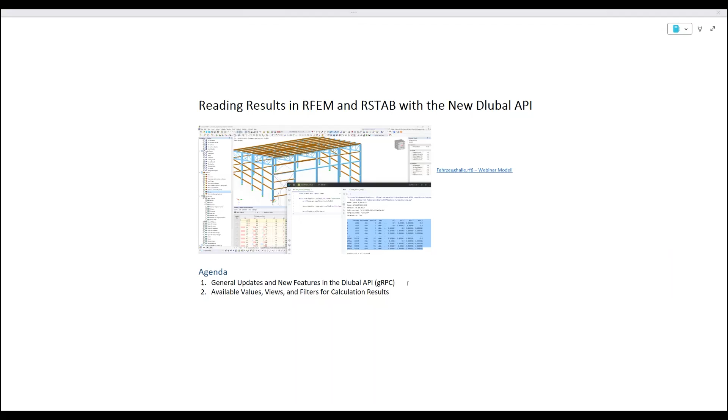The second part is our main topic, working with results. I'll show you some code, we'll go through the application together, look a bit into debug mode, and see how this is structured in the background and how you can work with it, plus some best practice tips on working with metric and imperial units with our results. So stay tuned, and I hope you enjoy today's webinar.

So just try it out, go into the basic settings of your program. I'll take a quick look afterward at how to get access via the API, but there's also a first webinar in this series with more focus on the basic settings. So here today, I assume you already know how to set it up, how to do your authentication, and how to get an API key.

All this is still valid, but we changed the subscriptions and agreements. So you just need to make sure you have an API key in your extranet account — check the previous webinar for that, please. With the change, we now have a pricing model where you can use 1,000 API requests per month for free, with full access to features regarding input data and results, which we are demonstrating today. What's important to mention is that we changed the way requests are counted.

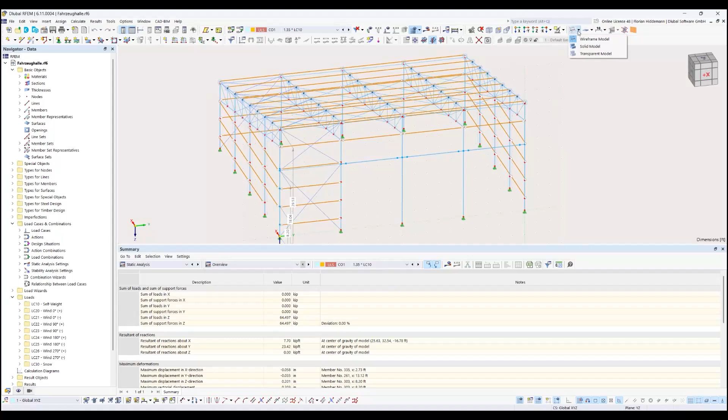I have an example model here. This is just a small construction with steel cross-section profiles and timber together, so I can demonstrate with you some results from the add-ons as well. This model will provide some results which we analyze and get via the API.

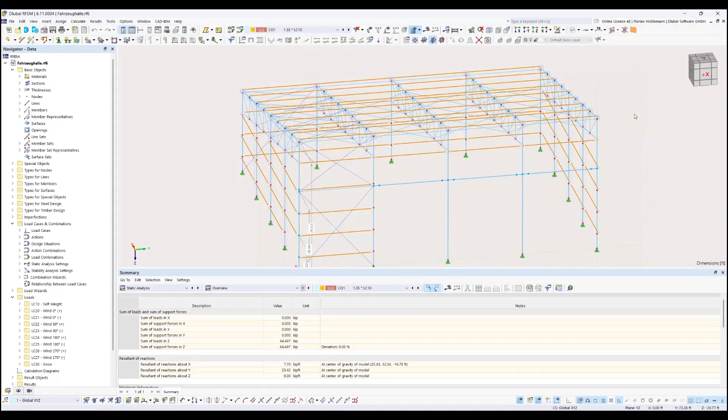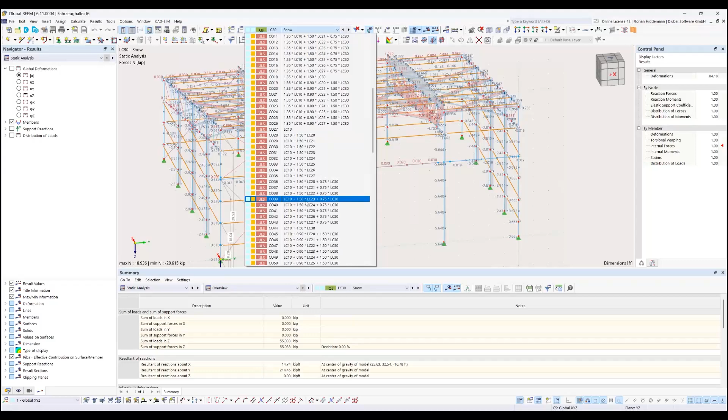So it is already calculated. We have some results here in the graphical user interface. You can see there are some imperfections defined in a few directions. We have the wind load assistant here, the snow load is applied, and it produces a lot of different combinations now. We will focus on getting some results and working with them via the API now.

So I'm using an IDE here, PyCharm. It's available for free. You can, of course, use whatever you want. But here I will go through these chapters together with you to demonstrate how it's working.

First of all, before we get into the results themselves, I'd like to highlight the differences you need to address for RFEM and RSTAB, because we are quite proud that this is available via one package. As you might be used to, you know already from Dlubal API, you import RFEM to work with the application here, and then you define every object, every call, every method with this package.

And what do you have to change if you want to work with RSTAB now? It's not so much. I copied the example from our website with multiple models, and you can see the difference here. Now we just import RSTAB, not RFEM, from the Dlubal API, and work with it exactly the same way. So it's really, really unified.

The only difference here is that in RFEM, maybe you know it, we have lines as a basic element to model, which don't exist in the RSTAB world. So in RSTAB, we define our members by nodes. The difference for these model examples is only that in RFEM, we define the member later on the lines.

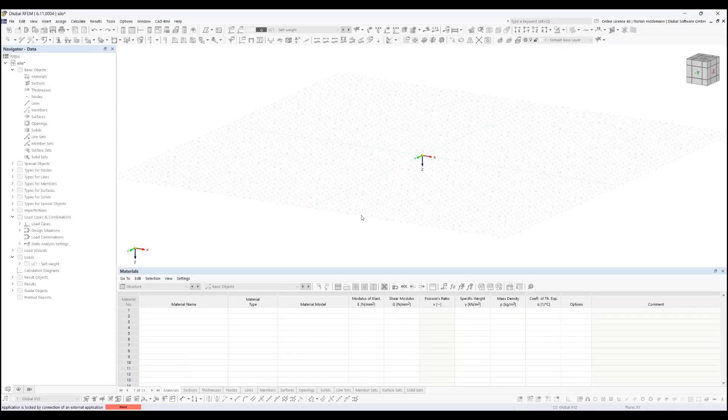Demonstrating it here, we just run the script, and our example model now created a silo here, which also has surfaces in it. And here a simple example of a steel hall.

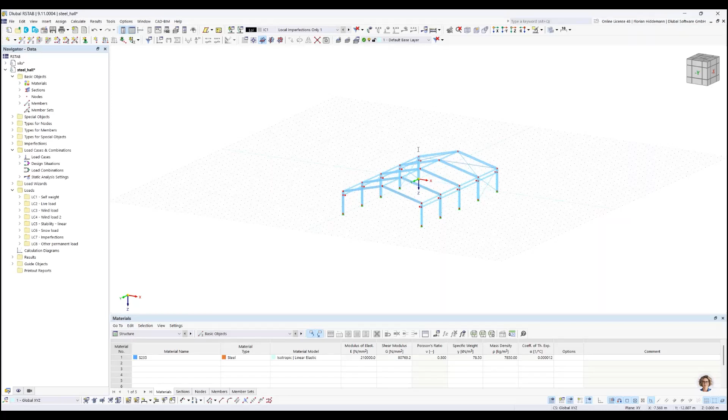In the same way, I also have RSTAB open. It's empty for now. I go to the RSTAB script, do the same, just execute it, and I will now switch here. You can see now also RSTAB can be controlled via our API.

So far, so good. I will switch back to RFEM and open our example model for the results. Now let's get to the results.

You should import pandas for use with results, because when we try to get the results via API, this object you will receive via the API command get_results is not the data frame from pandas in the first place. This is something you have to remind and use in your code, and make sure that we access the results via a data frame. The results are stored in results.data, so under results.data the pandas data frame is stored.

So if I get my results from the RFEM API, I use this method like it's also described in our documentation. For those who don't know it, we have a very comprehensive online documentation. If you look into it, get_results takes some arguments: it can get the result type and the filters. Filters I'll show you later.

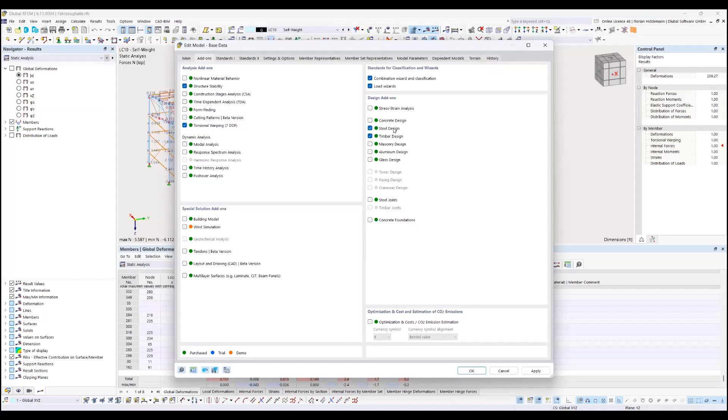As you can see here, some of the add-ons are active. In this example, it's steel, timber, structure, torsional, warping, and you can find these ones marked as true, together with some other settings. This is very, very useful if you like to set it up completely automated via the API and build a model from scratch.

So how to change these things?

The recommended way is that you get the base data first, then manipulate this object according to your needs. So if you make a new model, I already have one open in the background. First I'll change the base data. You get this object, then you change it via accessing these properties. For example, if you want to make the steel joint add-on active, you just change it here to true. Then in the next step, you set the base data with this manipulated object.

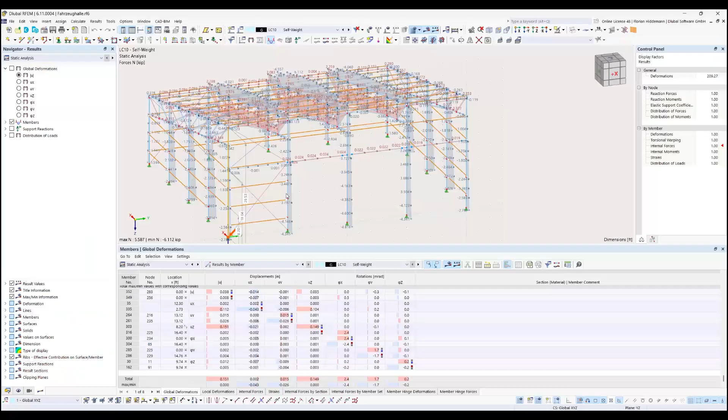But I want to change even more, because as you know, we provide a lot of different standards and codes, and it's important that these correspond with your needs. Here I start in the example with our European codes and German national annexes, set up for my local country, Germany. But maybe you want to change it to some other standards, and for this reason you can just change it in this way.

I defined a little dictionary here. You don't have to, but I think it's neat to do it this way, where you say these are every time my standard configs I want to use. For example, for the load wizard you take ASCE 7, for steel designs you take AISC 360 in one of the actual versions, and the timber design groups, etc. These are just defined with the enums we provide under RFEM based standards.

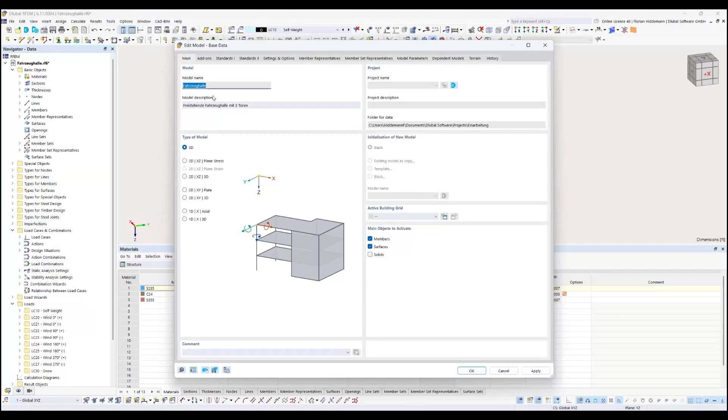Then I build a loop which takes these keys and values and changes my base data object I got from this call. If I process this now, it changes the configuration of RFEM in the background. So if I go back now, last time we looked into it we saw some European and German codes, and now it changed to ASCE 7. Even with the wood standard group, I've done it for timber design, and I also activated the steel joints add-on.

This is a very neat way to make your setup automatic. You can even change things like the global axis orientation, whether it's going upwards or downwards—everyone has their own favorite settings here. So in this way you can edit the base settings and make add-ons active, change the code, etc.

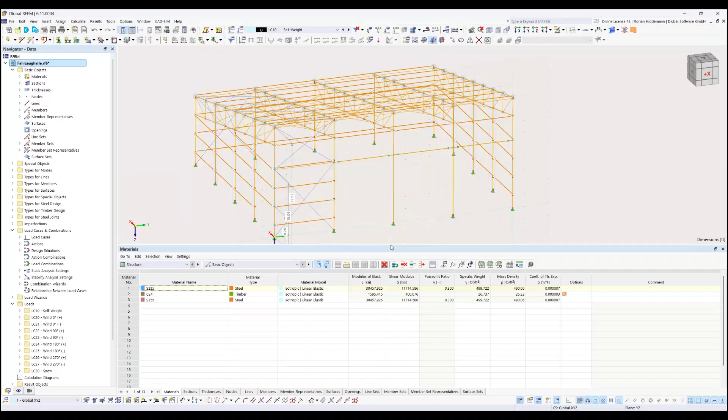Once you were doing this, I go back to the European codes for now because I calculated the results with them before this webinar. And what we're doing with the results now is we want to see the results from the steel design add-on and timber add-on, because this is also a new feature where we can access a lot of different results.

Our philosophy in the Dlubal API, for those who are maybe confused now, is a lean approach where you have only a few necessary commands and a lot of different objects you can define. For the client itself, these are the available commands, as general as possible. With the model or object definition, we try to define everything you want to access or change in the program. So if you want a specific result, you define a result type, go into this with an enum value, and hand this object over to our getResult request. This is the idea behind it.

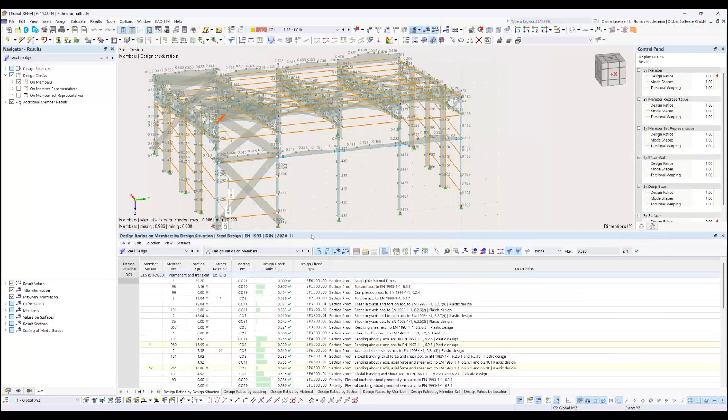So the model just loads up in the background. I pre-calculated it with some results from the steel design. Here are some errors and warnings, but we've also gathered results and done some checks about it, and I want to access these now.

So what do I do? In the app with the client, I will get different result types in this call. Because at the moment we need to call different requests for different result types, in the future we're planning to also allow a list for this, so that you can define a list with different result types—but it has some disadvantages. The advantage here is that with a big amount of data transferred, it's more stable to do it in small chunks.

So if I want my results for steel design, I have this result type here with steel design member design ratios. And for timber I have a different one. I built here in my construction a dictionary where I put every request into this dictionary under the key steel and timber. This is my personal solution to have a single result dictionary in the end, which contains the data frames under this key.

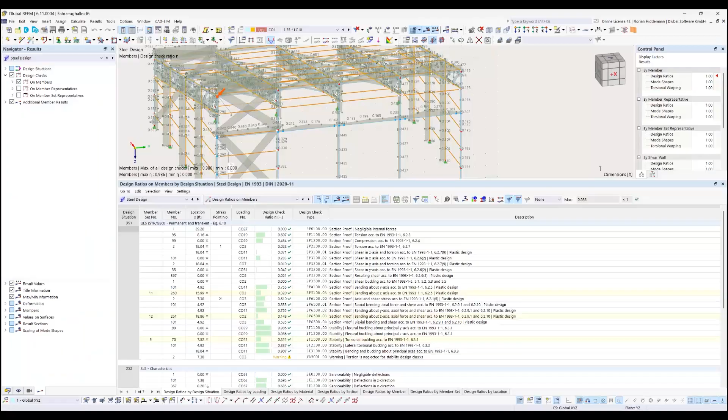If you do something in your code, you have your own use cases. This is just for demonstration purposes, just to show how this works and what you can do with it.

As you can see, there are a few objects in timber design where this model is not optimal from a structural point of view. But for demonstration purposes here, we found that some objects have design ratios over 1.

And if we go into the details, here you will find the same objects like we found via API. For example, member 331 was overloaded, and this is also one in the list.

And if we go to everyone else, we analyze these data here via the API now. So as you can see, we can make use of the add-ons as well. What is available, you can see it on our online documentation or here directly in the API.

This is a lot by now. We have it for aluminum design, concrete design, pushover, structural stability. It should be almost complete.

If you found any result you need which is not part of this list yet, please contact us, write us an email, go to the support contact, and we will try to make it possible for you. We want to have a full approach where we have complete access to all our relevant results here.

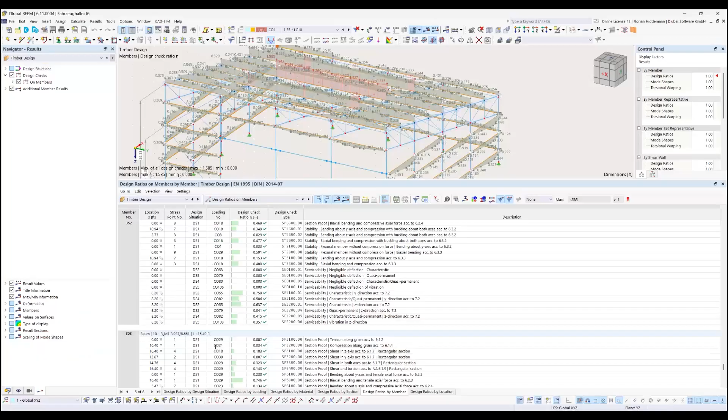But of course, this version here, this format is not very good for practical use. So in the examples, I just wrote you to give an idea how to work with this as a best practice style, a little module, the unit converter.

And here I have just defined a unit mapping where I want to define once, okay, every time I have a column with N, I want to convert this from Newton to kilopound. And even if it's made with vertical shear forces in y direction, or if it's defined in local axis direction with u and v, I just define here from what unit I want to convert. And so this little function here, convert metric to imperial, this is not part of the API, but you can write a little util function like I have done here and use it.

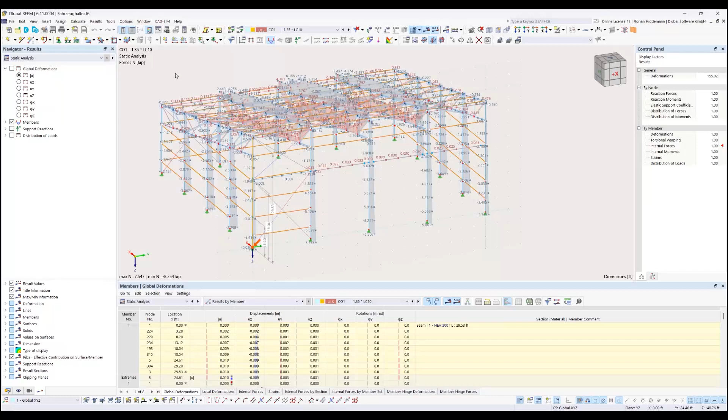So this is quite a clever way to make use of our data frames, make use of some popular Python libraries. And I would like to give you this in the hand. Of course, after the webinar, I'll upload these examples here on our website so that you can study this for your own purpose.

So last topic, before we close now, is result versus result tables. I want to show you in the last minutes how this is working. It is in fact now in the same way you are used to.

We just have another API method in comparison to get results, we also have get result table. And if you want to have a get result table, you have to filter. Yeah, this is something different than working with our normal get results function. Here you can define the result type and you get everything.

The filtering here is optional. If you do it on the server side, you can make use of a result filter, which looks like this, but you don't have to. The result table works differently. If you want to get a result table, you use a different API call.

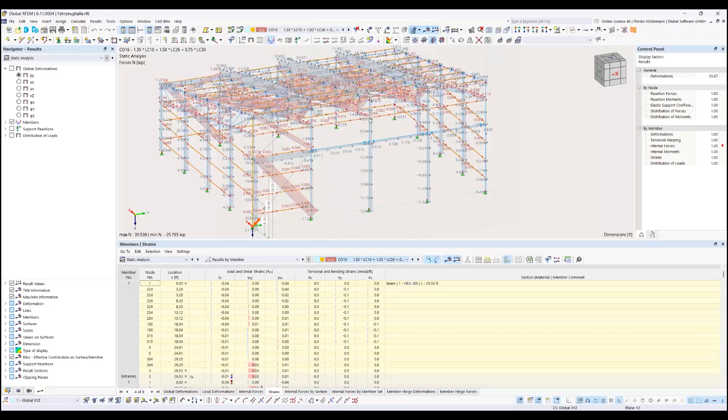So again, we will expect the result table internal forces with this setting. So we want to have exactly this table now via the API.

And you can see, I just print every column here. You get exactly the same layout like you are used in RFEM, but be careful, you have to check it. Some examples here have different columns, like if you have the normal force here and the vertical shear forces, these are with the index for the global axis.

Obviously, if you have the internal forces here, it can also be that you have the local coordinate system. So here in the result table, the indices are for the global coordinate system. In the RFEM GUI, these are the local indices here. So different ones. Make sure that you double check what you have delivered in the result tables.

And again, same principle. If you make a result table call, you have to access the data within to get the data frame. And what I did here is just make use again of my converter to get this data frame with the member forces of combination 1 and convert them to imperial. So the values you can see here are converted.

And you can see here, we also print out the summarizing lines, which are usually at the end of those tables. There's a total max min here. And now we have a total max min, again with 7.5. And without any processing or searching by myself, the result table is providing this as well. So the total max, total min, this is a tag column. And for n, these are the same values we have seen before.

So the last thing to close with, get errors and warnings. Also a nice and handy feature, because this is also a special type of a result table. And just to mention it on its own example, via accessing the result tables, if I have an error and a warning, I can access this table too.

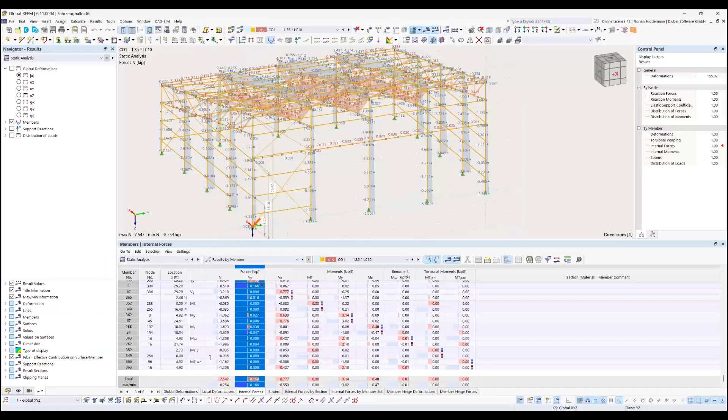If I change the model slightly, and with slightly I mean delete one of the main columns, I just try to calculate now, let's say self-weight. You can expect that the calculation will not be happy about this, and we have some stability errors.

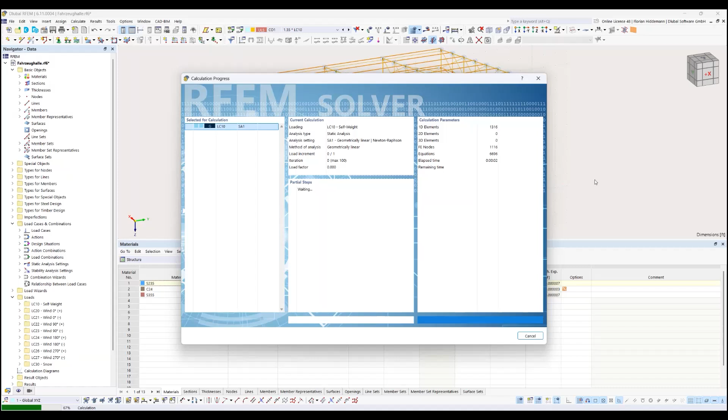So when this happens, of course, I expect you to do plausibility checks and have a try-except loop if you want to calculate with our API. But maybe you want to access now this information. And this is also a result table. We have the errors and warnings here. And you are used as a user to look now where it happens. What can I do? You have an error warning code, where it happens. And exactly this information is accessible via the errors and warnings table.

So this data frame here is printed in the short version. So we set the option that it prints every column. So from import pandas. So you can see the full information is available. You have the columns here, like in the GUI: which load case, which object, the warning number, and what is the text. And if you would access the data frame directly, you can see there is a full description available.

We can go into the debug mode to show it. Click in the data frame and you see here, this is accessible as data completely. The same strings.

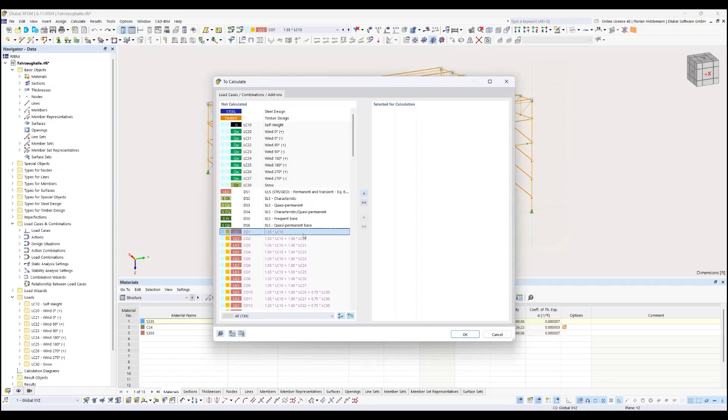Let's see if I just give the column here back. And I test it. I calculate only load combination 1.

Now I should have some results again, but only for this load combination, not for another one. And let's check it here.

So what should happen? We should see that we have results in general, and we have results for load combination 1. We don't have results for load combination 2. And here I just got again the result table member forces for combination 1, which I could have controlled by the true value I get from this check here.

So that was a lot of code in detail. I hope you enjoyed it a little bit. It's difficult to show this very theoretical stuff and codes, but I'd like to give you a deep dive into how it works, how this looks in action, and you are only limited by your creativity in what to do with it - automated design checks, user-defined workflows, processing information in other workflows, whatever you want. But here you have some tools now to work with our API, and in the end, the results are the most important thing we would like to have, because if you have a successfully calculated model, you want to do something with it, right?